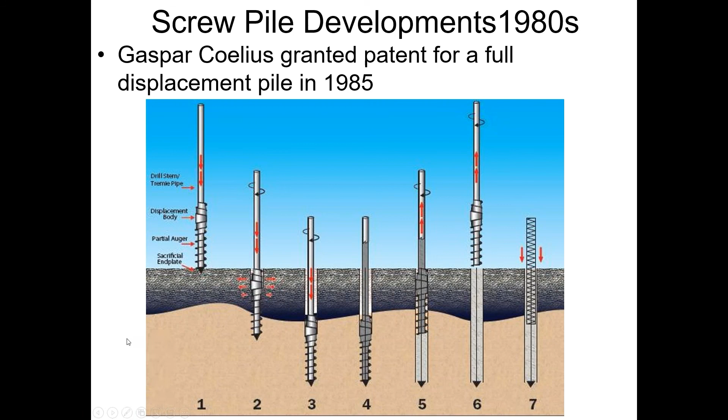The first European displacement systems came to the United States, as far as I know, in the early 1990s. And they were installed with rigs like the one you see on your screen now, which is a fixed mast rig. Quite different from the crawler crane mounted rigs that were used to install conventional auger cast in place piles. They had a turntable at the top, which was capable of producing very high torque, a stem that ultimately served as a conduit for the concrete or grout.

In addition, one of the things that came over with the European rigs was the ability to gather a lot of information on the drilling side of the process. As I said, the emphasis on the screw piles was on the drilling. And again, contrast that to conventional auger piles where there's little emphasis on the drilling. You simply make a hole as quickly as you can. Then the emphasis is on the filling with fluid grout.

But these rigs came over with the ability to monitor the rotations of the rig, a main winch proximity switch, which could determine depth, a pressure sensor on the motors that were driving the turntable so that you could monitor the pressure of the turntables, which is sort of related to torque, and an inclinometer. And this is incorrect. The inclinometer is mounted in the fixed mast, not in the tooling.

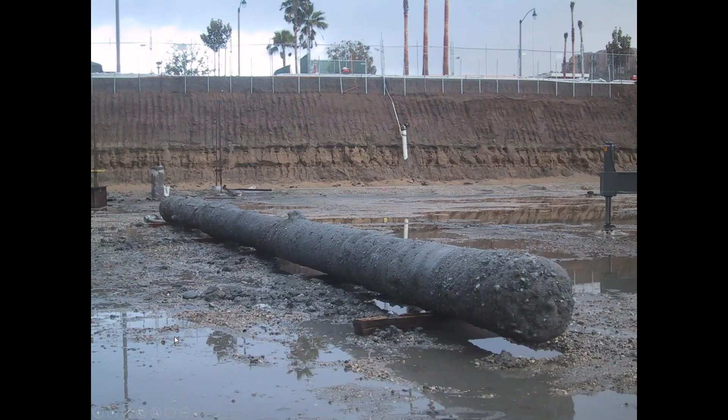This photograph was taken at a project which was part of a redevelopment of the old Howard Hughes Airport in Los Angeles County, and it was the first cast-in-place pile system that had been used in Los Angeles County. And as part of the approval process, Berkel was asked to exhume a pile so that the regulatory agencies could look at it. And there is the pile, and all that water was a result of the jetting process that it took to exhume that pile.

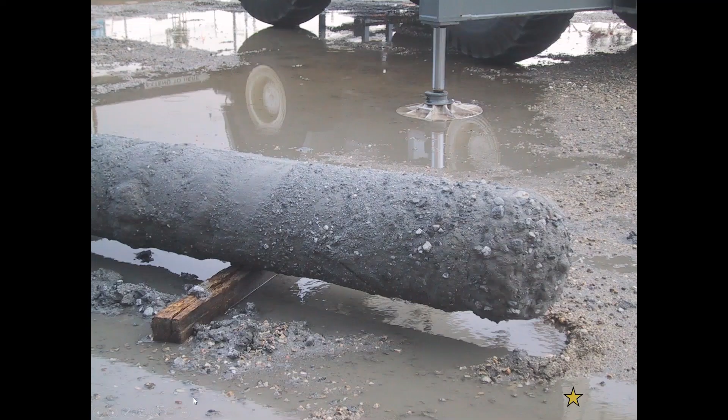And it was quite expensive and quite troublesome, actually. But in the end, it turned out well because it helps illustrate one of the benefits of cast-in-place piles. And you can see the upper part of this pile went through a silty sand, sandy silt, and the lower, approximately 3 feet, was in coarse sand and gravel. And you can see how the pile, there is no smooth pile interface here.

The grout actually penetrates into the sand, and the removal or the elimination of that smooth interface really helps develop shaft resistance in these piles. And that is one of the benefits of cast-in-place piles in general.

Again, these installation platforms are developing very, very rapidly. And at the current time, you can find torques of the driving heads of 150,000, 200,000 plus foot-pounds, 40 to 80,000 pounds of crowd, which is downward force on the tooling, a fixed mast for stability.

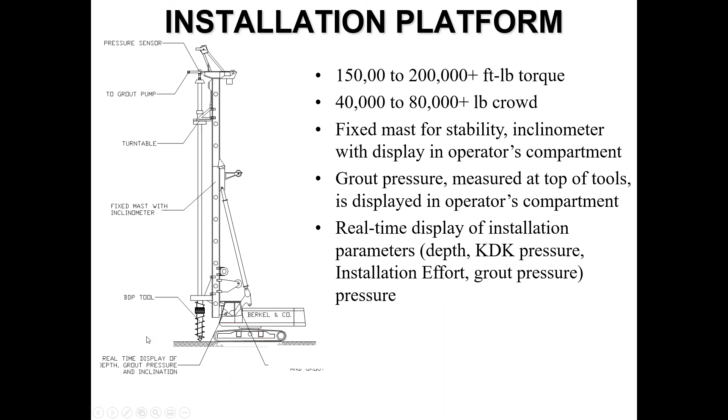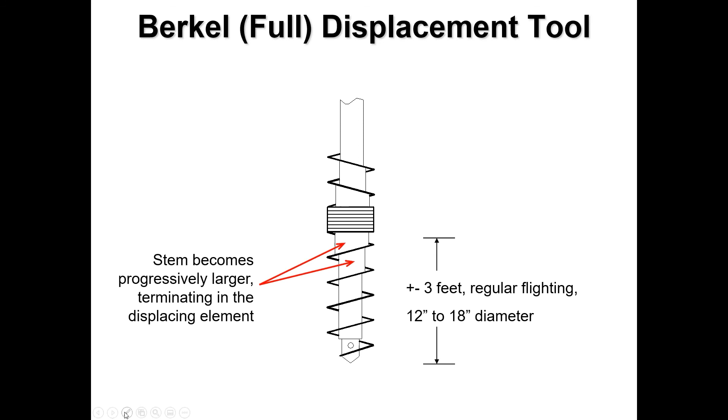The displacement system that I'm most familiar with, because I work for Berkel, is the Berkel system. It again contains about 3 feet of regular flighting. Then as you move up the flighting, the stem becomes progressively larger and terminates in a displacing element, which is the same size as the tooling below it. Above the displacing element is some reverse flighting, and then a stem that is smaller than all the tooling below it.

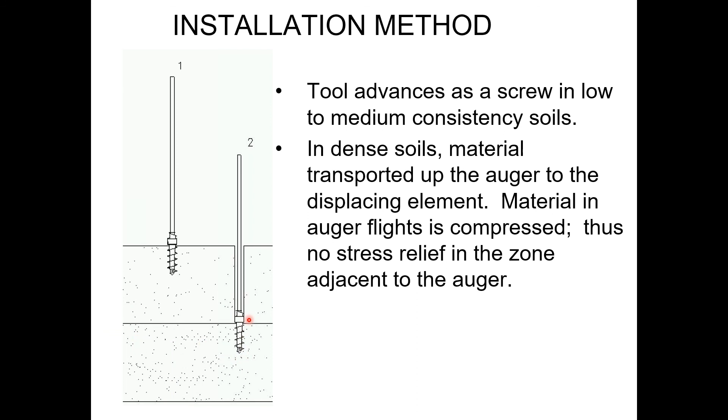The installation method looks very similar to the one that I described for the Coelius pile. You drill down, the tooling penetrates like a screw in loose to medium material. If dense material is encountered, there is a transport of material up the tooling, and then it is forced out to the side by the displacing element. When the termination level is reached, grout is pumped. The grout pressure is monitored by the operator.

Again, remember the pressure transducer is mounted on the top of the tooling, and he can see when the system is pressurized. And when it is, he begins to lift off, and the tool is rotated as it comes out so that any material which may have fallen into this annular space around the stem is pushed out to the side and ultimately displaced.

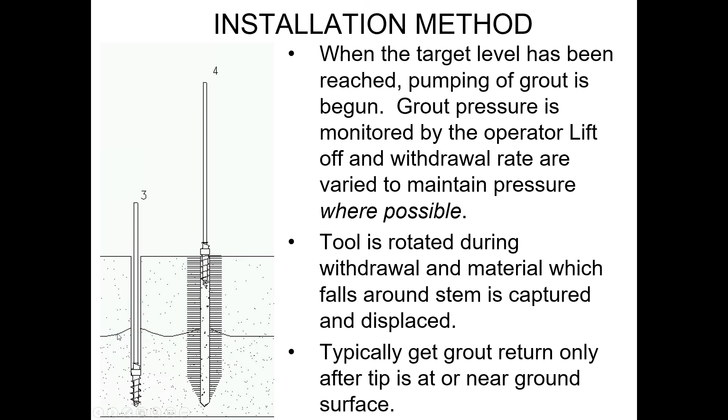One of the differences between displacement pile systems and conventional auger piles is you typically only get a grout return after the tip is at or near the surface, so that the pressure of the soil here is no longer able to withstand the pressure of the grout that's in this column, and grout squirts up by the side and enters the surface. So you don't get a head of grout as you might expect to get in a conventional auger pile operation.

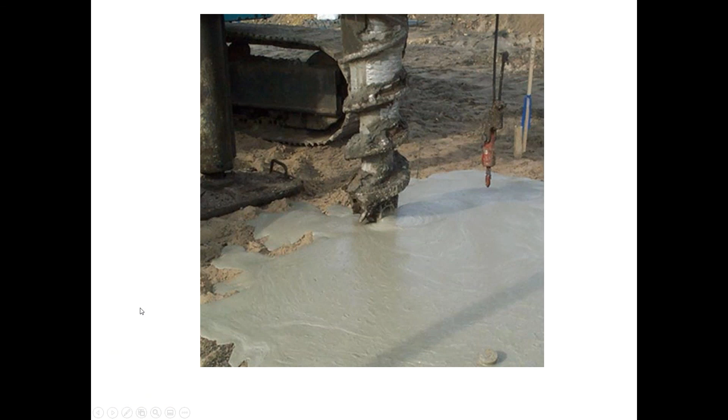I want to discuss an intermediate or partial displacement pile system, and this system, in fact, is much like the original European screw pile system. To compare the tooling, this is conventional auger piling tooling. This is the drill displacement tooling we just talked about. And this in the center is the intermediate displacement pile tooling.

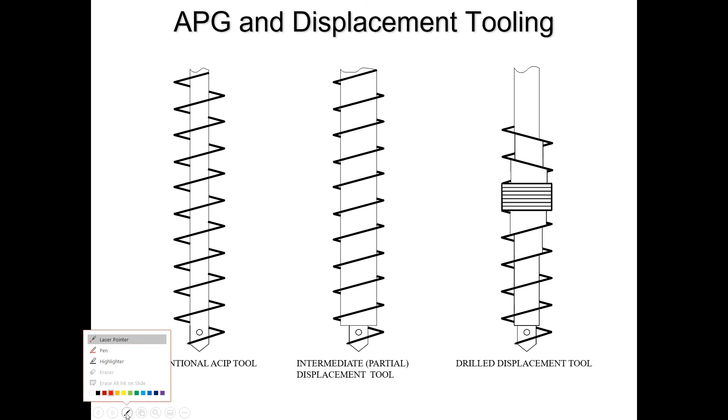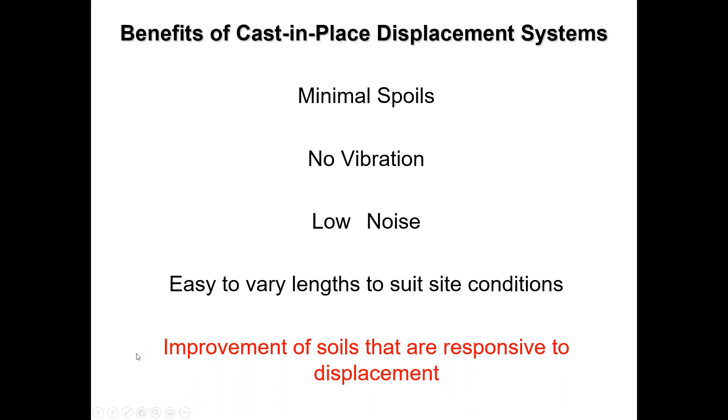So early in the use of the displacement system, when it was being used primarily as a piling system in the late 90s and right after the turn of the century, it became obvious that as we continued to put this tool in the ground, the material got more dense if we were working primarily in granular materials. So an early attempt to quantify that level of improvement was a project in South Florida where we had a typical test pile setup, 4 reaction piles, test pile in the middle. And we came outside of that setup and created a symmetrical 4-pile cap spaced at 4 diameters. We then did a CPT in the center of that cap, and then started doing CPTs at 1 diameter intervals away from one of the exterior piles.

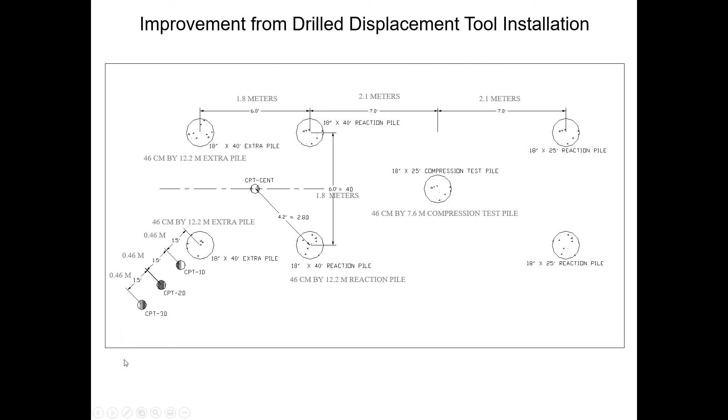And the idea was to find out at what point there was no discernible increase in density away from the pile. As luck would have it, we had an equipment failure, so we only got to 3 diameters away from the pile. So we used the information from 3 diameters away from the pile as the ambient condition. So this is the ambient condition. The area of interest was between about 10 and 25 feet below the surface, which was a fine sand with a trace to some silt, and some occasional clay and silt layers. And the average cone tip resistance in that zone was 32 TSF.

This is a plot of the information for the cones at 3 diameters away, the red trace, 2 diameters away, the blue trace, and 1 diameter away, the black trace. And what we found, taking what we then thought we had to use as our ambient condition, we go from 32 TSF to 68 TSF to 84 TSF. We later learned that the discernible distance at which you can tell if displacement is changing the density of the soil is between 4 or 5 diameters from the pile.

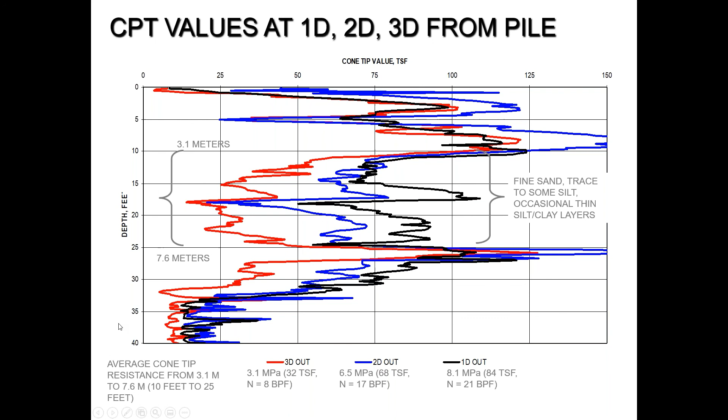But again, this was an early attempt somewhere in the early 2000s, I think, at trying to figure out what the level of increase in density was in granular material adjacent to displacement piles.

For the CPT in the center of that 4-pile group we created, again, this red trace is the ambient condition. The black trace is the CPT in the center of the 4-pile group. So what we found was in the center of that group, we had about a 3-fold plus increase in cone tip resistance in that sand zone after the installation, in the center of what would be a 4-pile group spaced at 4 diameters.

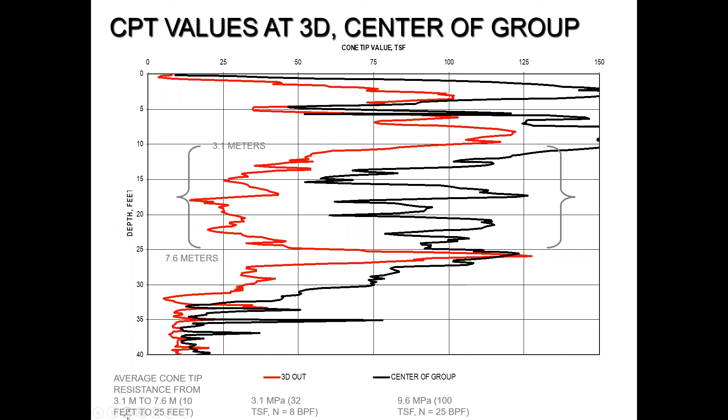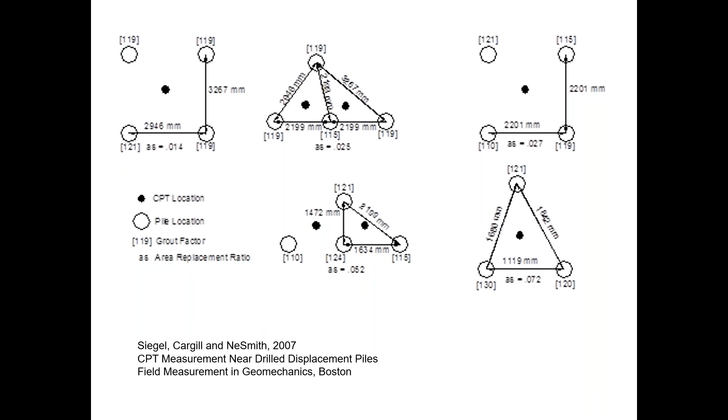After we did that operation that I just described, it became clear that there were possibilities to use this system as a ground improvement tool, as well as a piling system. And so we embarked on a bit more ambitious testing program, looking at a variety of configurations. And that information is published in 2007. It was also published in an ASCE publication, but it basically laid the groundwork for an area replacement ratio type approach to ground improvement using the displacement system.

So in summary, what we found was when displacement elements are installed in materials that exhibit granular behavior, there's an increase in material density in the vicinity of the piles. It extends to about 4 or 5 diameters away from the pile. The increase is most pronounced in loose to medium dense materials. As the in situ density increases, the percentage of increase in density decreases, and there was no discernible increase when that tooling was extended into dense granular material, basically somewhere around an N value of 30.

And the fact of the matter is it becomes extremely difficult to extend the full displacement tooling into materials with a standard penetration resistance in excess of 30. We found that the increase in density is additive. That is, the more elements that are installed, the greater the level of increase. And as a result of that program I just described, we came up with a design process to develop a configuration, size, and spacing to achieve the desired level of density for a variety of soil types.

If you're doing CPT work, piezocone work, anything that exhibits a pore pressure response is going to be a bit dicey because, again, you need this material to be free draining in order for it to densify. Early in my work with this system in terms of mitigating liquefaction, I was under the misguided conception that if something graded out as liquefiable, then it should be densifiable by the displacement system. And again, I admit that was misguided.

And what brought me back to reality was saturated silts. And the fact of the matter is, saturated silts in general do not respond very well to displacement. And in one of the case histories later, I will show you that. But again, in terms of materials that you can depend on to densify with the passage of the displacement tool, clean sands up to about 40% fines. At that point, it becomes a little bit dicey. Saturated silts, I wouldn't count on it. My heart has been broken several times by trying to densify saturated silts.

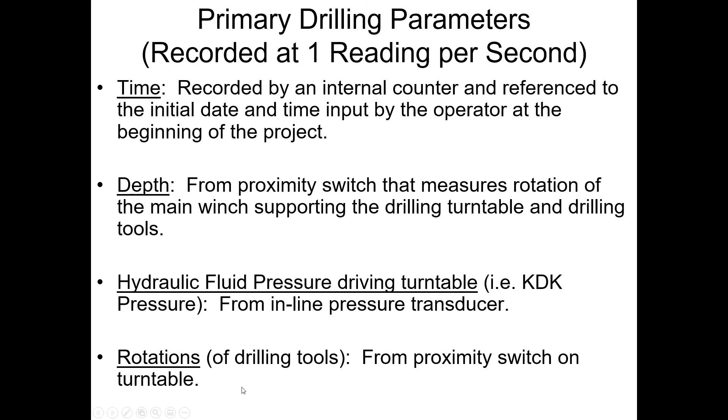So even in the European screw pile system, they had already begun to look at KDK pressure, or hydraulic fluid pressure, as an indicator of what was being penetrated. And this is a fairly straightforward record of an installation process. This is with a full displacement pile. This chart shows a trace of the parameters: KDK pressure, hydraulic pressure, depth, and grout pressure with time.

And down in this portion, those parameters are shown with respect to depth. This is the penetration depth. This is the withdrawal process. This is KDK pressure, again, hydraulic pressure to the motors driving the turntable. And this is grout pressure in casting. This parameter is installation effort. And the reason for developing this parameter was to attempt to show a picture of the profile as the pile was being developed. The red trace here is cumulative installation effort, which is basically an integration of this black curve, and it can be related to total pile capacity.

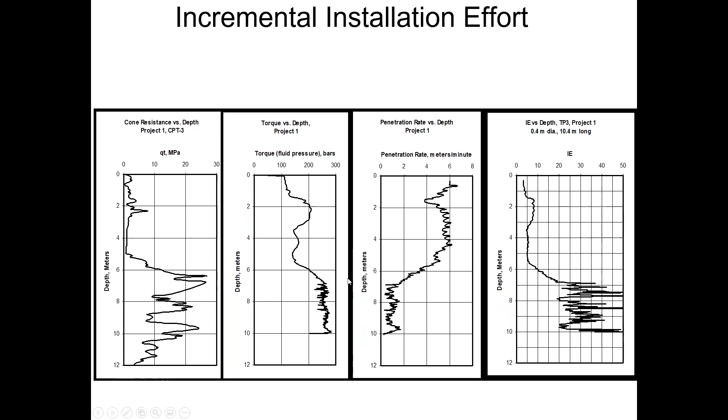So we combined fluid pressure and penetration rate inversely to come up with this concept of installation effort. And again, the only reason for this existing was to allow for a picture of the stratigraphy to be seen while the element was being drilled, and also to provide a permanent record of what was being penetrated. And you can see that this incremental installation effort trace looks a good bit like the CPT.

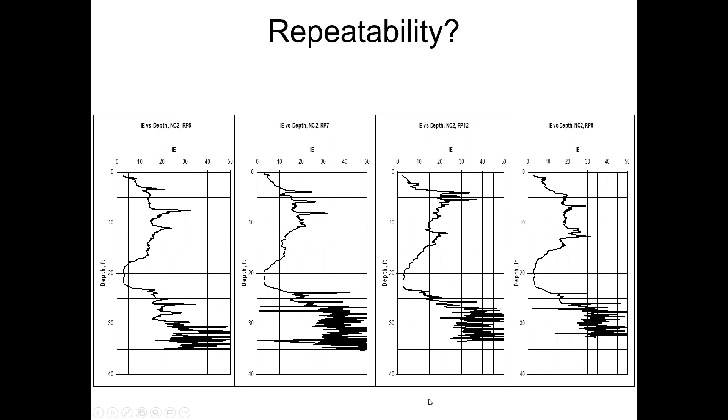I was asked early on, okay, you did that once, but what about repeatability? So these are the records from 4 reaction piles at a test pile setup. And you can see that the first thing wasn't just a fluke, that you do get a good representation of stratigraphy, or a repeatable representation of stratigraphy from this system.

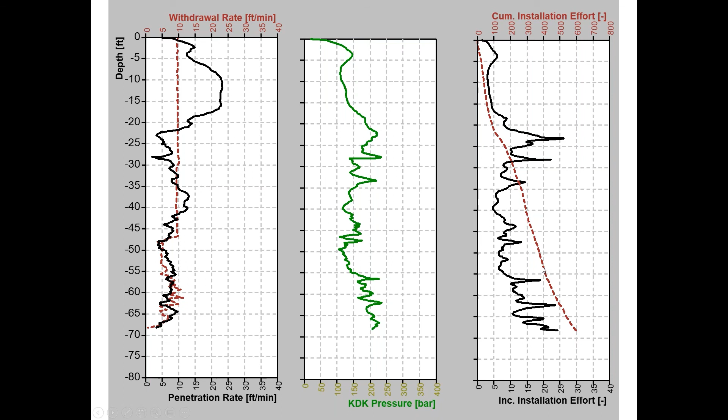This slide shows what the operator sees and what can be seen on a laptop or a cell phone, actually, as the pile is being driven: the installation, the tool penetration on the way down, tool penetration on the way up, the fluid pressure, and then the incremental and cumulative installation effort.

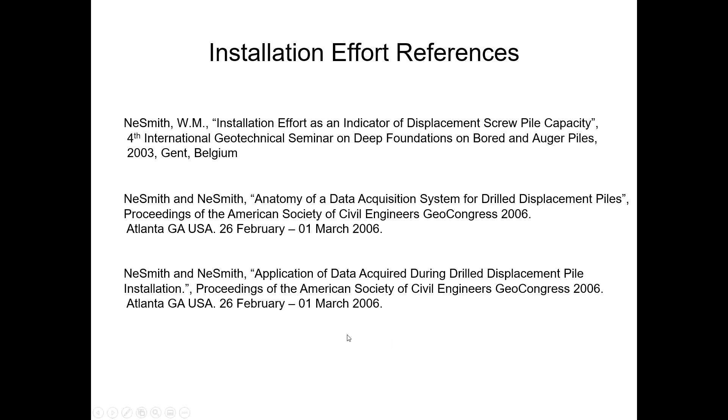So if you want to look into this installation effort business a little bit more, it was discussed in excruciating detail in a series of papers. The first paper was at the BAP conference in 2003, and then in 2006, a couple of papers on the use of the information that can be developed from the installation of these displacement piles.

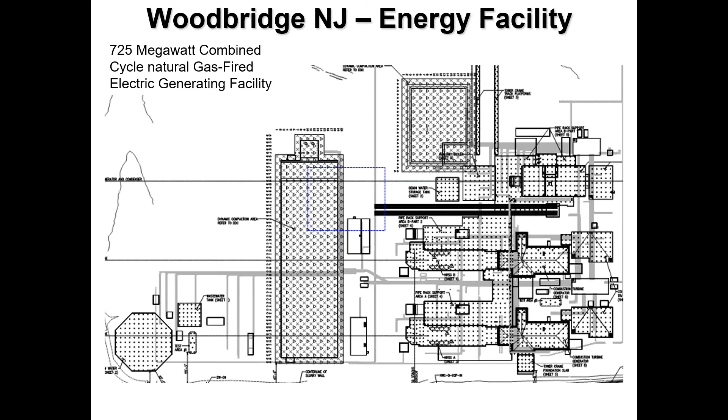The first case history that I wanted to look at was in Woodbridge, New Jersey, a combined cycle gas-powered generating plant. It was not a liquefaction mitigation. It was a ground improvement system where we were looking to improve conditions to the point that mat foundations or shallow foundations could be used for these elements. This is a layout of the displacement elements that were installed. The idea was to install a system that would allow foundation bearing pressures of from 3,000 to 4,200 PSF.

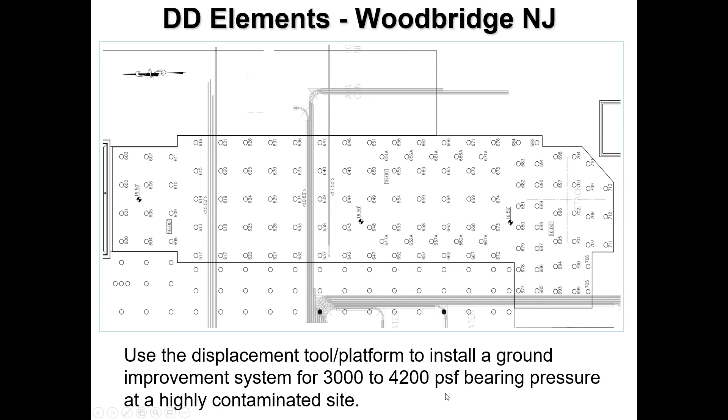The kicker on this site was it was highly contaminated. The material in this uncontrolled fill and loose to medium sand was highly contaminated. There was a dense sand as the basal layer, and then saprolite below that. So the charge was to improve, stiffen the uncontrolled fill, improve the loose to medium silt and sand, get the toe into the dense sand, but not dare penetrate down to the saprolite because of the contamination that was up in this zone.

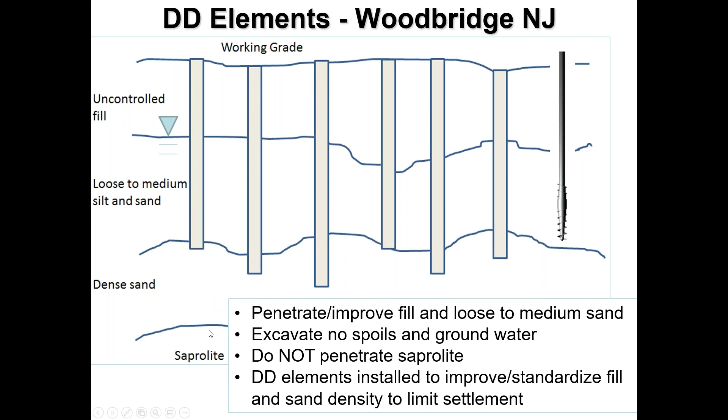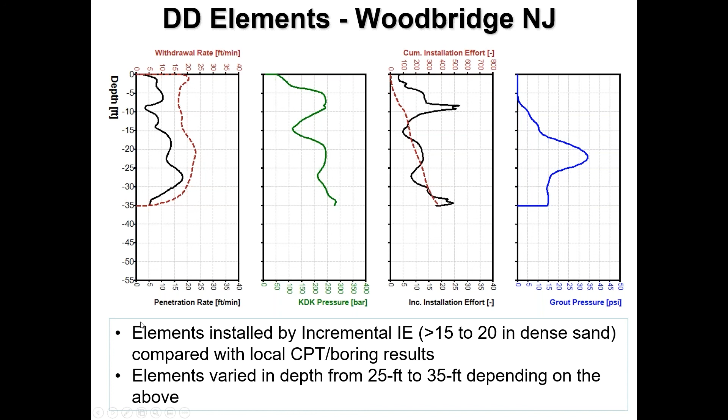So liquefaction, probably everybody listening to this program understands, at least in concept, what liquefaction is. It occurs normally in loose granular sediment or fill that is saturated by groundwater, and then there is some strong shaking, most often by earthquake. So the most common way to attack this situation is to try to improve the loose granular sediment or fill to the point where we have a factor of safety relative to liquefaction in excess of 1.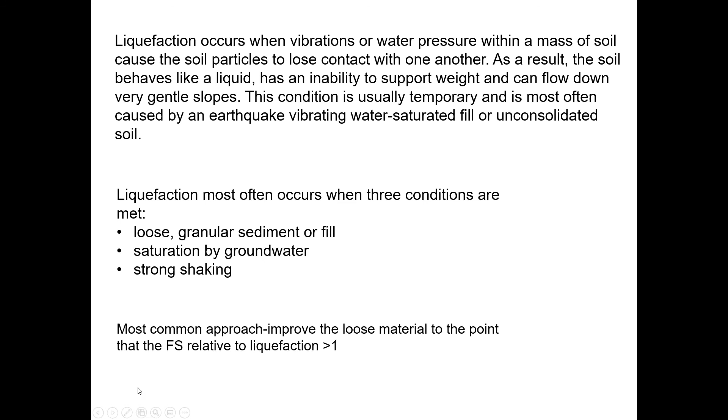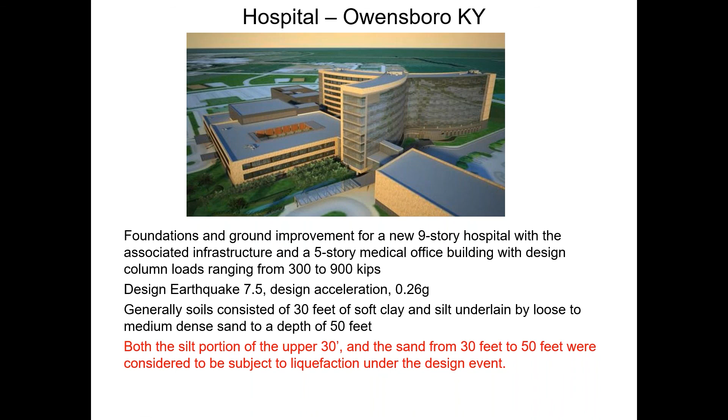So the design approach here, based on the charts that we had developed, was to install 7,500 16-inch diameter by 50-foot elements at a spacing of 8 feet center to center. That was a triangular spacing in the building area to mitigate liquefaction in the lower sand. We adjusted that spacing to align with the orientation of the footings so that we got a symmetrical spacing around the footings, and I'll show you an example of that later. Then we also installed an additional 1,700 16-inch by 35-foot shafts in the footing areas to reinforce the soft silts.

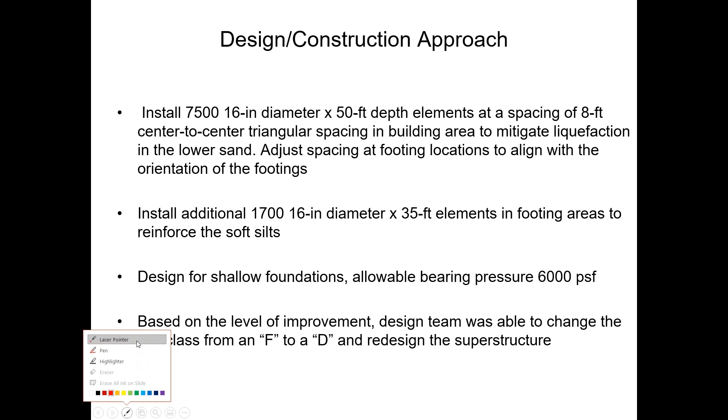Ultimately designed for shallow foundations for an allowable bearing pressure of 6,000 PSF. And a real key item was, based on this improvement process, we moved from a Class F to a Class D, which resulted in some significant redesign and savings in the superstructure.

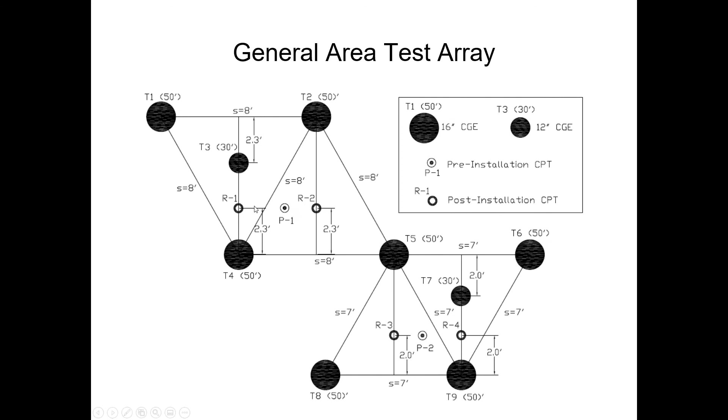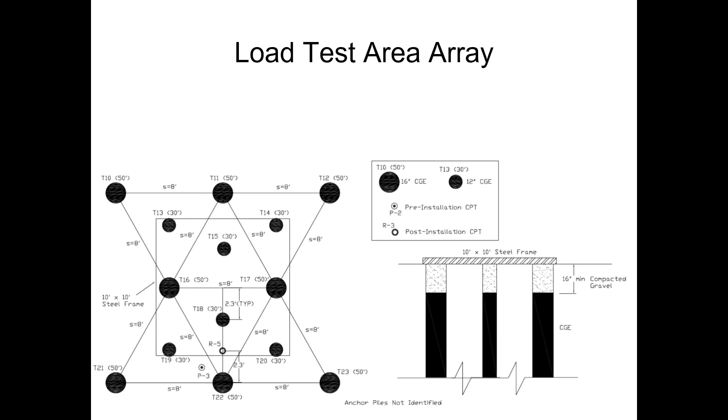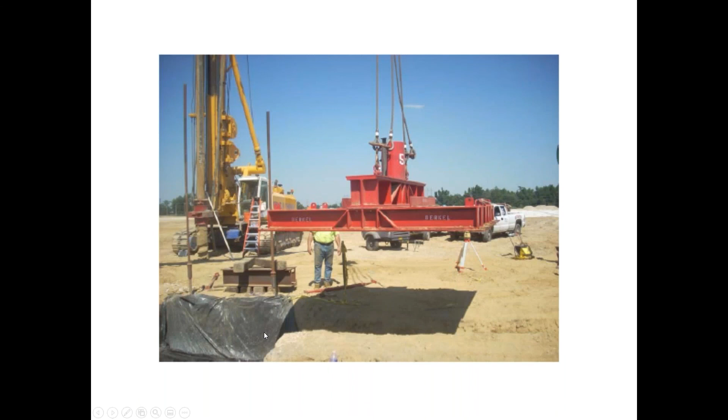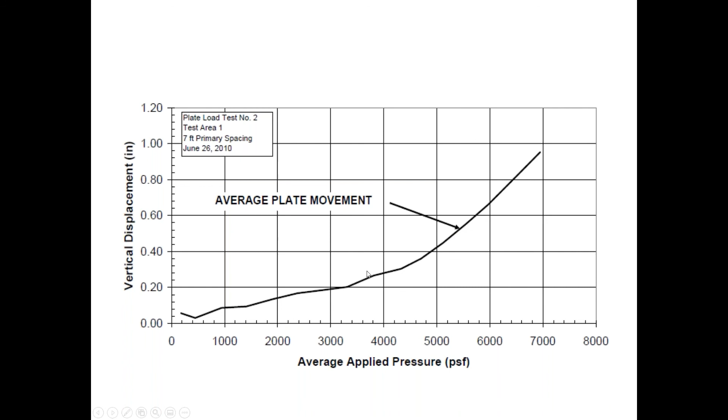We did a series of load tests. One was a 10 by 10 plate load test. We designed and built a frame to run this load test with. Again, we did, I think, 4 load tests like this. There was some variation in conditions across the site. Basically found that the movement in the plate load test was acceptable for what we needed.

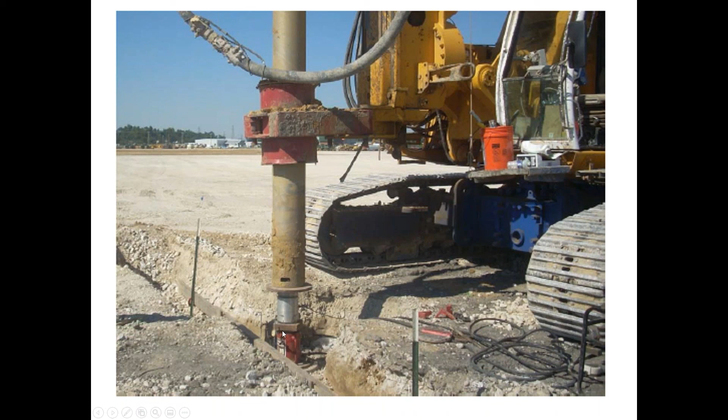Actually, Dan Brown and Associates was our consultant on this, and they wanted to see some modulus tests, so we did those using the installation platform as reaction, and that's an example of the result that we got from that test. In the end, what we found was we did a really good job of improving the sand that existed from 30 to 40 feet into a position where the factor of safety was greater than 1.

And this, again, was another heartbreak area, because the silts that show as liquefiable did not respond to displacement. And so we still had a factor of safety of less than 1 against liquefaction. So the extra elements that we put in the foundation area were not only to reinforce the clays and silts from a settlement standpoint, but to boost the level of confidence for materials in this upper 30 feet that showed a factor of safety of less than 1 in an earthquake situation.

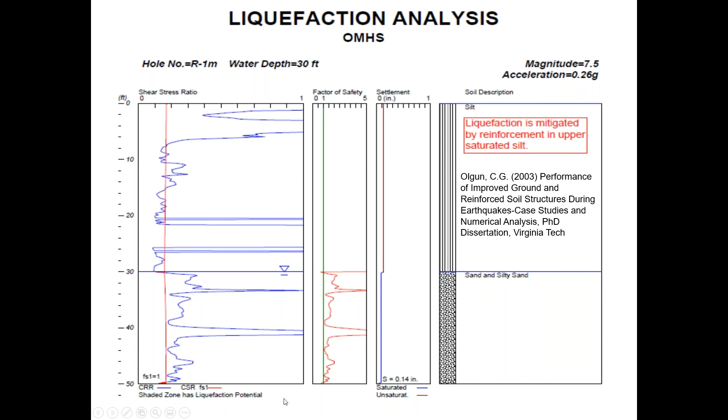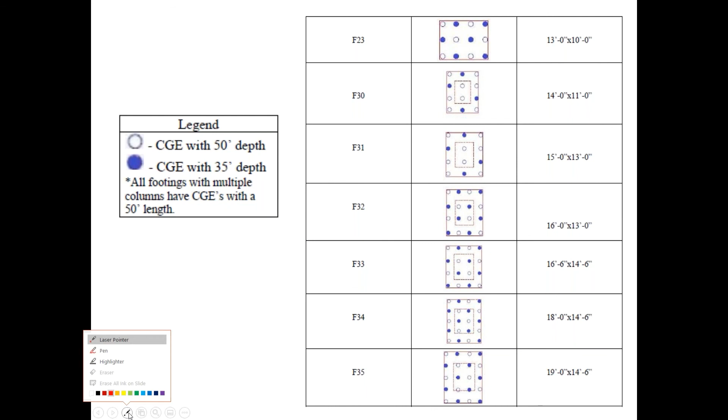And this was the predominant paper that we relied upon at the time in terms of reinforcing this area of silts and clays rather than improving it. And this is just an example of what we did for each footing location in terms of our primary spacing, which was the open circles, and then the secondary CGEs, which are the closed circles. Again, we ultimately went to all 16-inch elements simply because the 12-inch elements were too delicate for the excavation operation.

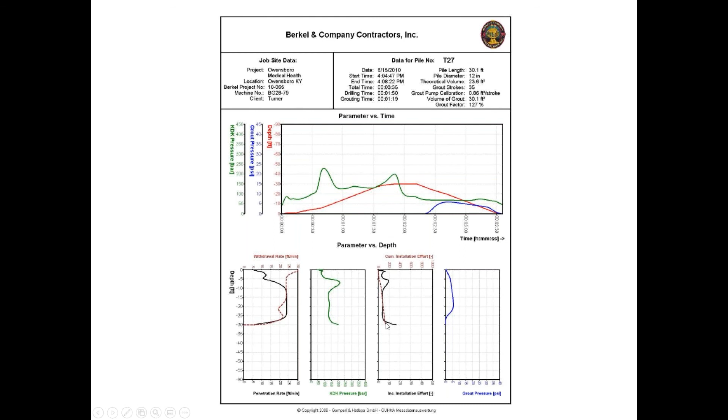We did use the installation effort concept when we were putting in the shorter elements, just to verify for us that we were reaching the lower sand. And you can see here again where the installation effort trace kicks out at about 30 feet, but there was some variation in that lower sand.

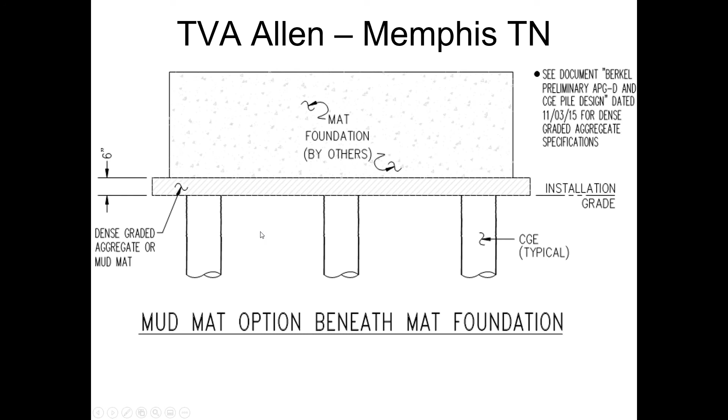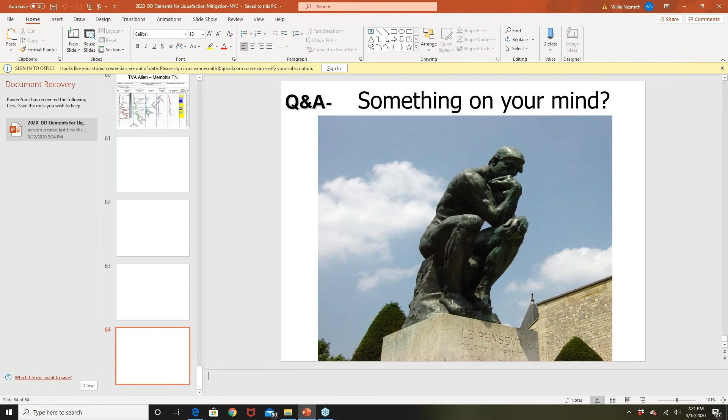No, if it's done properly. And I'll share with you some uncomfortable experience. When we first started with this process, if you look back at, I'm sorry, I have wrecked the process here. If I could get down to one of the installation records.